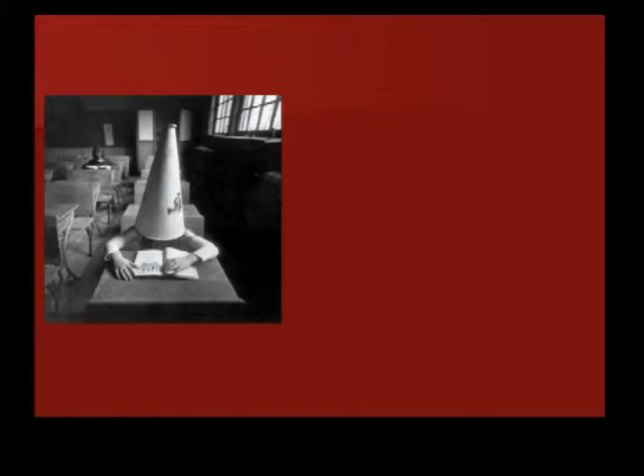I grew up, they called us rednecks affectionately, in western Pennsylvania on a farm. Oldest of 4 kids, and we had several of every different type of animal. You can see from my 5th grade picture that scholastic aptitude wasn't really my thing. By the time I was released from high school, I had probably built miles and miles of fence and could talk a horse into or out of almost anything, but higher education was not something that was in my future.

I went into a chef's apprenticeship program, crazy Swiss guy, an 18-month program. You're literally a slave for that period. Anybody know who Gordon Ramsay is? This fella made him look like Tinkerbell. If we could have had those kind of TV shows back in the early 80s, I'd be on TV, but just not doing this.

I had a number of restaurants back east and decided that the East Coast was, well, the East Coast, and wanted to move. My mother had listened to John Denver growing up, and before I realized it was a crush she had on him, we learned a little bit about the Rocky Mountains, so I loaded everything I owned into a van and drove out to Conifer, just on the other side of Evergreen. Lived there for a couple of years and had a couple of restaurants up in the mountains and then down in Evergreen, and really liked it.

My wife, girlfriend at that time, now my wife, bless her heart, pointed out to me very quickly that that wasn't the best life to have a family. Working when everybody else is on vacation and all the holidays and special occasions, and not being home to be part of the family, was not really the best career choice.

So I thought, well, I have residency, I like animals, I'll go to CSU and get into wildlife biology. And I did. I started wildlife biology and realized very quickly that I'd given up a fairly lucrative career as a chef to maybe make $6 an hour as a temporary park employee. My wife came back into the picture and reminded me of these career choice decisions I was making.

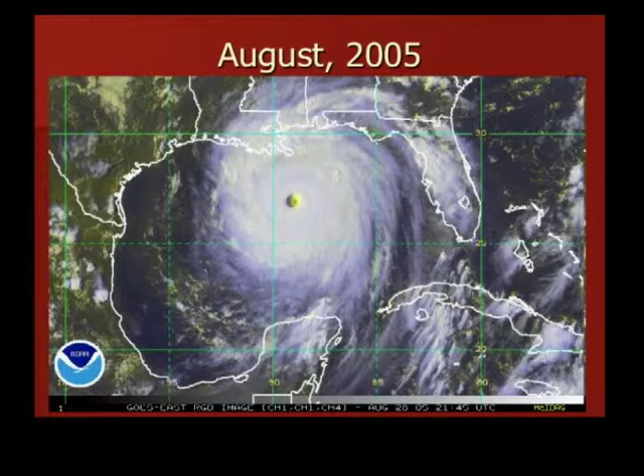In August of 2005, that changed. We know what happened in New Orleans. Hurricane Katrina came in and absolutely devastated that area. From space, it was a rather beautiful event, but the aftermath and the destruction left on the ground is still being worked through today.

There are places in the Ninth Ward that are absolutely uninhabitable. You don't even want to drive through there, let alone walk. Whole sections of that city are still completely rotting because of the effects of that storm. The infrastructure took a substantial hit, still an issue even at the Super Bowl.

Anybody who watched the Super Bowl saw the power go out. They knew that was a distinct possibility because of the age and the water damage done during that event. The infrastructure is what failed.

The T-walls, the levees, the gates, mostly around the interface between a levee and a hardened structure, failed nonetheless. You can see them trying to drop sandbags in to stop that levee, kind of like the Dutch fellow with his finger in the dike. It looks good maybe on paper, but it's not very sustainable.

Areas where they had larger sections come apart led to the unraveling of that entire system. It doesn't take much water, or much of a breach, for a city that's completely below sea level to fill up with water. It happens very quickly, and not having the pumping to get that out is a real problem.

So what we thought we knew about that levee system and about providing protection for overtopping, we realized very quickly in the last week of August, first week of September, that we got caught with our shorts down. We really didn't have a good idea of what the resiliency of the systems we were recommending or employing for protection really was.

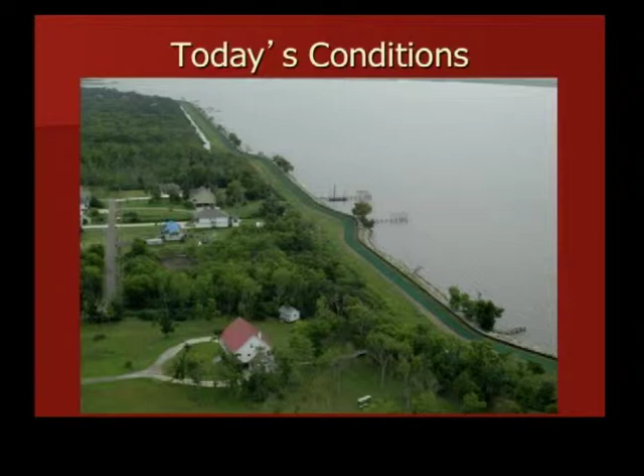Today, a good bit of the levee system has been reconstructed. They've built it up to a higher elevation. It sinks anywhere from inches to feet a year, so they have to come in and put more lifts on top to keep the crest elevation low enough to take up the smallest footprint, but high enough to provide protection to the people living behind it. This is the Penn levee.

It's been very well reconstructed, very well documented over the course of the last 5 or 6 years. You can see the top of the Penn levee. They put an I-wall in here, a concrete splash pad, and then they have vegetation. Vegetation grows down there—it's not like here where we can't get vegetation to grow. It grows out of concrete in most places.

So it's a very viable tool if you know how to design for it, if you know how to actually implement it and provide the resiliency. That's a buzzword, if you will, for how well the vegetation can absorb the hydraulic stress from a steady or unsteady overtopping condition.

Some levees haven't been treated at all. They've been constructed and they're in place. This is down by Houma, Louisiana. The levee's in place, you can see some grass growing on top. They came in and put a lift of topsoil on their clay-filled levee.

And it started to rain, and just the rain washed that topsoil away. Come to find out the soil has so much salinity to it that we can't get vegetation to grow on it. Once that topsoil's gone, the soil isn't able to even populate vegetation. So the treatment has to match the field conditions so that we can come up with something that's actually usable.

You can imagine if this were overtopped, the channelization that would occur—that levee would be gone just like this. The height's great, but it doesn't have any protection on it.

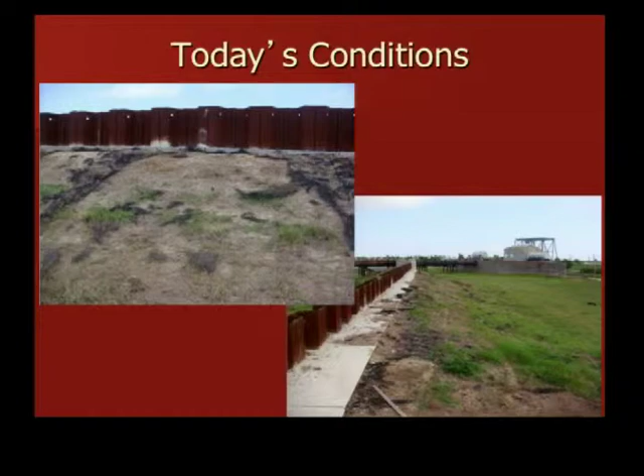Some areas they think are protected. This section down by the Gordy pump station has a turf reinforcement mat on it. Decent product probably, but it gets pulled up into the mowers and shredded. So just the operation and maintenance around that pump station has shredded this protection system, killed the vegetation, and lost the reinforcement of the engineered product underneath it.

So now the protection they think they have on paper—the guys back in the district in New Orleans think they have a factor of safety on this site—they're nowhere near close to that because the solution that was implemented wasn't maintained properly. So it's not just the determination and selection, but the operation and maintenance of that solution is paramount to its success.

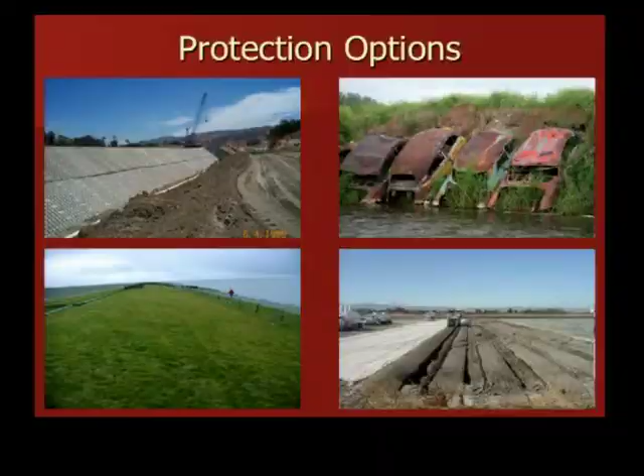So we've got a lot of tools available to us that we could use to protect levees. Some work, some don't. The key, of course, is to not have your protection system undermined. Willow plantings. Now, a lot of you probably know about bioengineering. Great for stream bank restoration, not so great for high energy waves. So being able to take the toolbox that we have and pull the appropriate tool out and apply it so that you don't have catastrophic failure and keep people safe is what this is about.

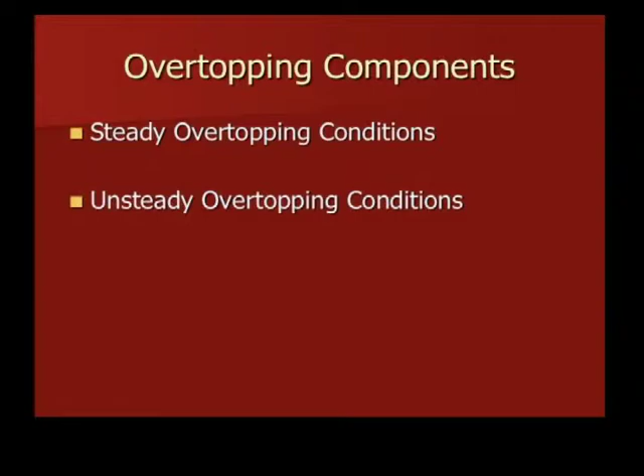So there's two pieces to overtopping components, as you well know, steady state and unsteady state. As an industry, as a body of knowledge, we know a good bit about steady state overtopping. We'll talk briefly about that, but there's an awful lot of work that's been done, mainly in the last 15 years, spawned by manufacturing. People are coming up with better mousetraps. The engineered products, the guys that come into your office and want to do brown bags, lunch and learns, leave the volumes of literature on your desk so that you spec their product in your plans. That's really what's driven what we know right now as far as the performance of vegetation and engineered products.

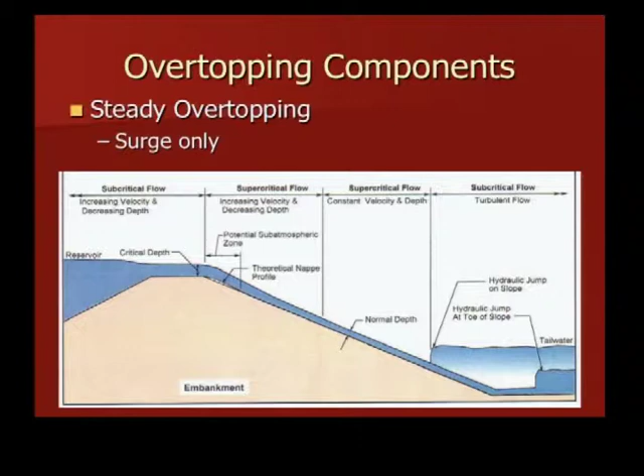Unsteady, we'll talk about in a minute. We know a good bit based on small scale modeling, but we don't have a lot of prototype knowledge because of the cost and the scale associated with getting that kind of data. Steady state, like I said, we understand pretty well. If it's a levee or a dam, water level comes up, water comes down the protected side for a given period of time, constant shear stress, constant velocity. We know we have negative pressure up here that can be an issue, but you tend to reach normal depth, fastest velocity, highest shear stress, what we can protect against.

Testing-wise, again, through the manufacturing community, ASTM has a subcommittee of sediment and erosion control technology. I made the mistake of stretching in a meeting once, and I'm now the chairman of that subcommittee. We have 11 sections of all the different types of products that you can imagine for erosion and sediment control. Everything from the ditch check structures you have on your construction site to high-performance TRMs, mulches, tackifiers, the chemistry that goes into the polymers that we make the mulches that we're trying to treat burn areas with. There's ASTM sections in that subcommittee that dictate how it's manufactured, what the QA/QC is on it, how it's tested, and most importantly, how it's selected, so that as an engineer, a designer, or an owner, you have a set of go-bys to be able to determine what that best tool could be.

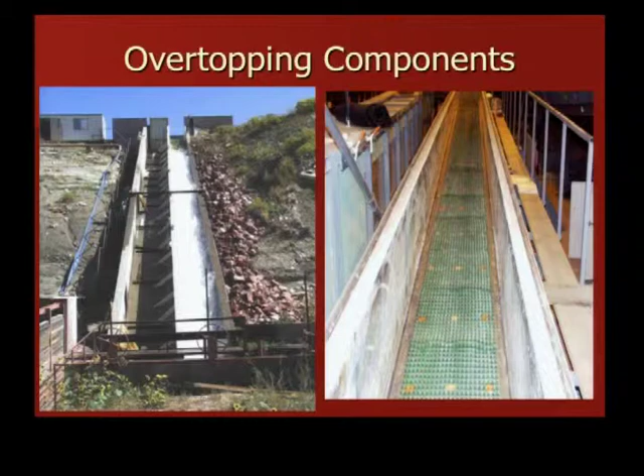The testing, as you well know, with sediment control or erosion has to be prototype. You can't scale that well. You can, but it doesn't capture that interaction between water and sediment and erosion very well. Very, very limited work you can get out of scaling. So it has to be a prototype application, whether it be in an unvegetated or a vegetated condition. The end of the game, of course, is the importance of finding where along your slope you have that, can't say failure anymore, so I think the buzzword is performance threshold, where you have too much sediment that's moved out, so that treatment, whether it's articulated block, vegetation, soil cement, lime stabilized clay, whatever it is, ceases to function, where you would be worried if it was your stamp on that job and you went out and looked at it and saw a gully.

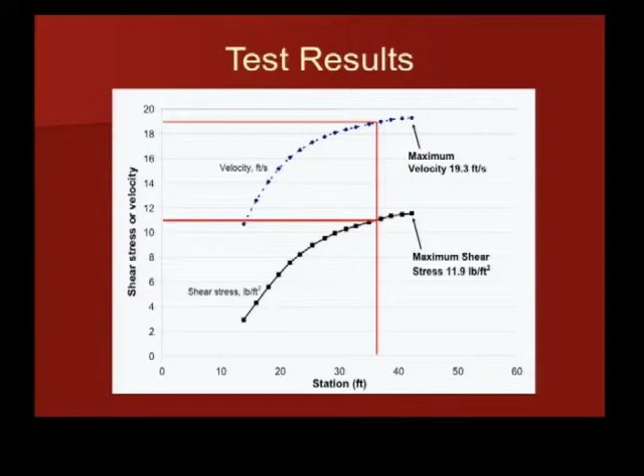That's the performance threshold that we have to determine from testing, so we can get that value of shear stress or that value of velocity to put back into whatever design methodology we're using to compare against rock or to compare against native vegetation or these myriad of products that we have available to us. What it really gives us as engineers then is a summary table essentially of different types of treatments and what those permissible velocities and shear stresses are.

Anybody size rock in their daily jobs here? There's enough rock sizing equations out there that we could each have our favorite with no duplicates. And it could probably hold up in a court of law as to why you picked that one. These types of treatments aren't that lucky. If they fail, it's done. So there has to be one method for an engineered product.

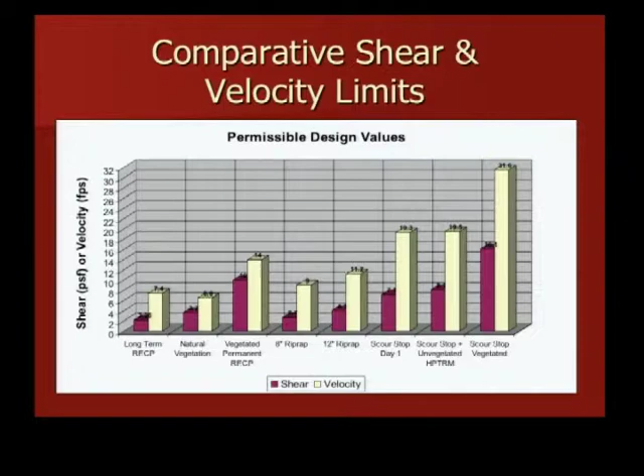For some reason, well, most DOTs consider riprap a temporary countermeasure, a maintenance issue, not an engineered solution. For engineered products, that's not the case. We need to be able to know what that threshold is so that when it's designed and implemented on our project, the attorneys don't just continually circle around the site every time it rains waiting to see something that's gone wrong. We have to have that definitive performance information to be able to implement it. Steady state, we're doing pretty good.

With the exception of hydraulic jumps. Any of you that do anything with levees or dams or any type of embankment, there will be a hydraulic jump at the toe of your slope. We know nothing, be clear on that, nothing about hydraulic jump hydraulics. Now you can go to Chow's book and you can get the equation and put out on your piece of paper what your jump length is and what your conjugate depth is. That's really nice. But we know nothing about the turbulence and the energy dissipation within those jumps.

The Bureau makes stilling basins. Type 4 Bureau of Reclamation stilling basin, huge, massive concrete structure because we don't know. The risk of being wrong is much, much greater than the cost of concrete, so you throw a lot of concrete at it. For what we're talking about with engineered solutions as far as incorporating vegetation, we know nothing about what's happening in this area of hydraulic jumps. So it is still the area for steady state overtopping that there needs to be a considerable amount of effort put into.

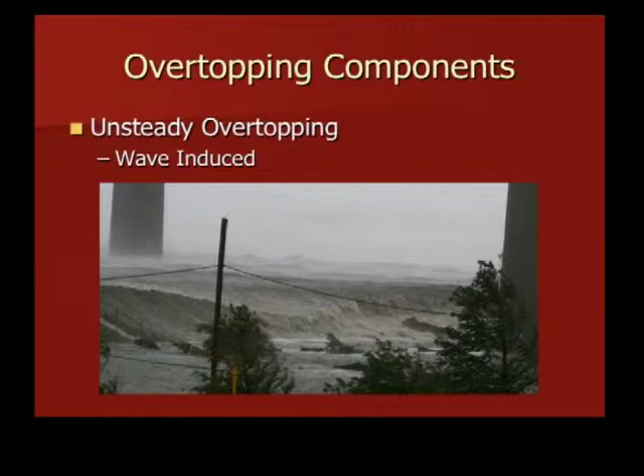Unsteady now is when we have waves, of course, on top of that. Now it can be a situation where, in this case, the ocean or Lake Borgne, huge body of water, can see it from space, or small reservoirs, Horsetooth. You get the wind going in the right direction, you go, what, 4.5 miles of fetch? You can probably get 2.5, 3-foot waves that form on there during a storm event, just because of that depth and length of fetch.

So it's the combination of waves on top of a steady state overtopping, or the waves just by themselves on the front side and on the protected side, that is really what Katrina alerted us to the deficiency in our design techniques. The reason we don't know a whole lot about this, as I said, most of the work that's been done with waves are in modeling basins, things a little bigger than twice this room probably, where you can generate waves and look at structures.

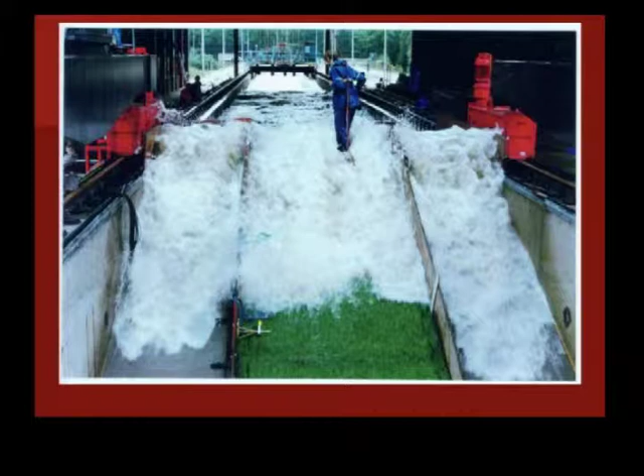Full-scale wave testing, this is the Delft Hydraulics Institute in the Netherlands, is not cheap. They can do it, but this guy just got the bill, and you can see what he thought. It's $250,000, $300,000 just to get in the door there to try to get anything done. So you can imagine for the manufacturing community to try to get information on their techniques, their products, their systems is rather cost prohibitive. So we don't have a lot of information on the effect of waves coming down the protected side of a structure, with or without that steady state component.

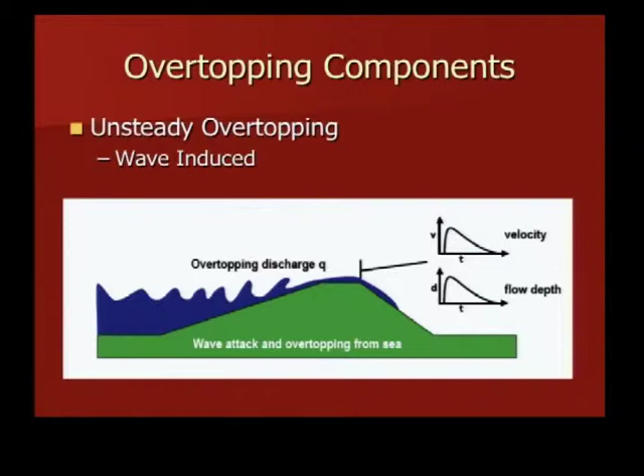What we do know from modeling, though, has helped a lot and gets us to where we are today. We know that for every geometry of levee and storm condition on the flood side, there is a signature velocity and flow depth at the crest of that structure. So if we know the storms, the hindcasters are very, very good at getting the computer models, you've seen the models where you can see the storm brewing and worst possible scenario of conditions. We know what that depth and velocity would be at the crest of that levee.

We know that as far as the height of the levee, if I lower my levee for any given storm condition, I essentially increase my unit discharge. Makes sense. If my levee's up here, my storm level is here, I don't have a problem with steady state, but waves could still form. As I lower that levee, more and more water is going to come over for a given storm condition. So the trick for the designer, for levee owners, is to balance that.

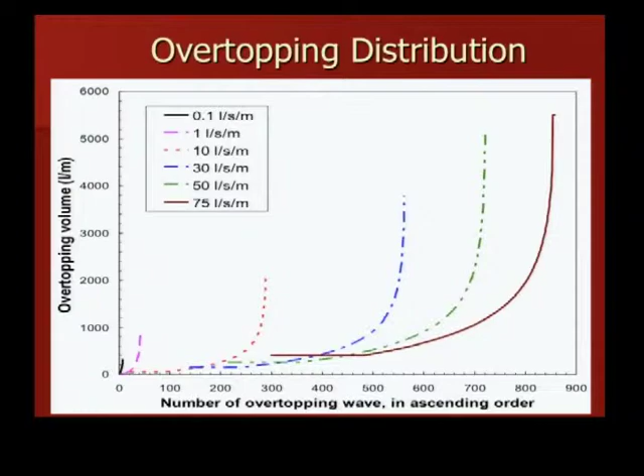You can imagine a levee with a 4-to-1 side slope. That takes a heck of a footprint. So every foot you go up takes a tremendous amount of real estate that you just don't have in a lot of these areas. So being able to optimize the height of that levee to provide protection for whatever your design event is the trick to most levee design systems. So again, the hindcasters, the coastal modelers, are able to tell us that. They're able to say, okay, for this area, this geometry, here's what you can expect. Here's the storm, the number of waves in that storm that you can expect to be conveyed down that protected side.

So the Dutch, if you've ever been to the Netherlands, it is completely below sea level, very, very far below, meters below sea level. So a breach to them is the end of their country. It's not just a blemish in New Orleans history. It puts their country out of business.

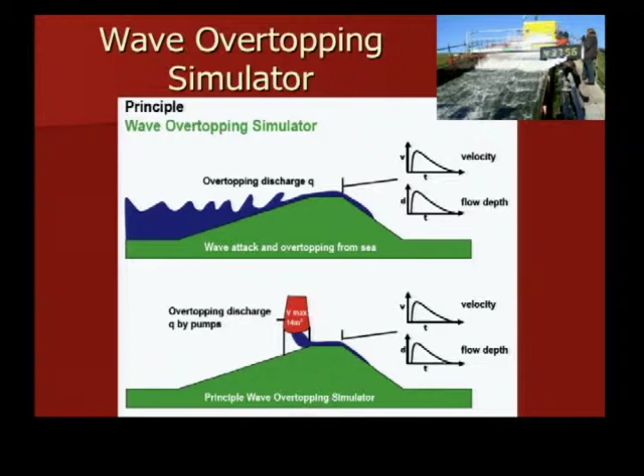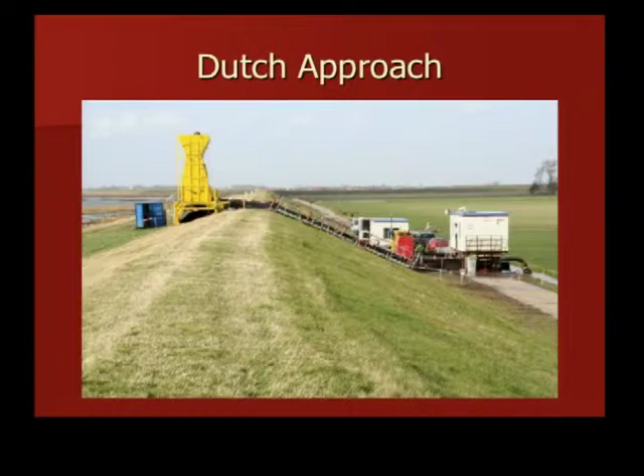So they take it very, very seriously. Dr. Van der Meer has designed a device that he can take out to levees that simulates that depth and velocity. So when he takes his unit out, this is in Germany, and sets it up on the flood side of a levee, this grass on this protected side doesn't know that it's a nice, sunny, beautiful day and there's no water on the flood side, because the shape and the control of that simulator is mimicking that depth and velocity at the crest.

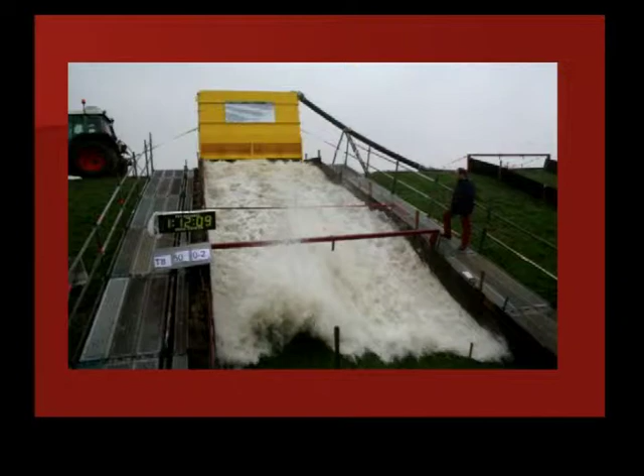So as it accelerates down the back side, it's a natural wave that's being conveyed. It has had great success in the Netherlands. You can see it's about a 3-meter wide flume, able to convey fairly large quantities of water, and then document the damage. Well, in 2006, when this really first started with post-Katrina, one of the ideas that we had was, okay, let's bring that device or build one here that we could then take down to the levees of New Orleans and test these systems and see just how resilient this clay and grass combination is.

Well, you can imagine, the Corps liked the idea, but the PR of that was a little daunting because they really didn't want to find Jimmy Hoffa in the middle of the levee and also expose these levees to the damage that they would see for us to actually be able to learn anything. They didn't really know what was in some of them. So they pulled back from that field testing program.

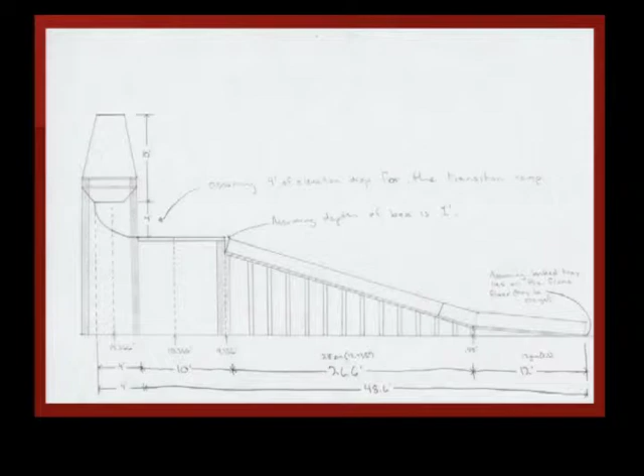I'm either really smart or not very smart at all, but somehow we ended up with this project here at CSU and this drawing from Jentsje's brother Gerben, who designs farm equipment, genius mechanical engineer. But this is the drawing we got of, okay, this is what you need to build to solve Katrina's problems. We went into it a little bit further, started putting together the pieces.

The way the simulator works, again, is that we have to get the water to come out of this tank. It's essentially taking potential energy and turning it into kinetic energy. So we have to get the right volume of water in that tank, release it from that simulator in the right period of time and with the right shape of exit so that we're able to, again, mimic that depth and velocity at the crest of the levee for every wave in that storm condition for every modeled height of levee.

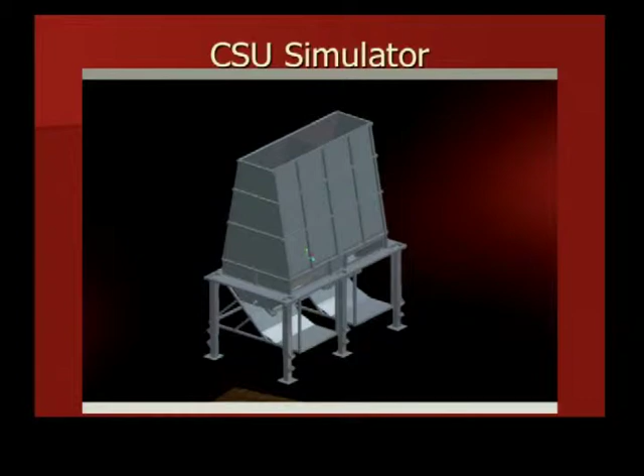We had a great team of folks to be able to work on it, put it together in 3D software so that we could actually build it, have an inner tank, the different volumes, I'll show you in a minute. We had to be able to simulate from 0.01 CFS per foot, which is nothing, to probably about 5 or 5.5 cubic feet per second per foot, which is a lot of water. I'll show you a large wave here in a minute.

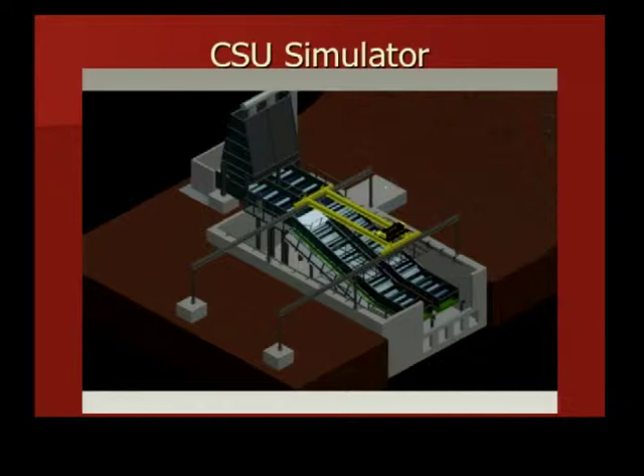So the inside geometry of that tank was actually quite complicated to be able to get the right release of each wave volume, small, medium, and large, to make sure we had that signature depth and velocity. Outer volume for the bigger wave volumes, and then a set of trays. Now we couldn't take this to the levee, so we had to bring the levee to the laboratory. Really why it came to CSU is because of our experience with steady state overtopping. We've written most of the standards that we have for steady state interpretation of product performance or system performance.

So we had to have a way to be able to actually bring the levees to us and place them in the simulator. We have 2 separate trays here. So what we ended up with was a device that gives us full-scale testing, 2 test channels so that we can expedite the process. Steady state capabilities also, because in a lot of instances you'd have the waves that come over, but as that surge level comes up, you start to get the steady state coming down that protected side also. It's an exponential function of the stresses, how they increase with that.